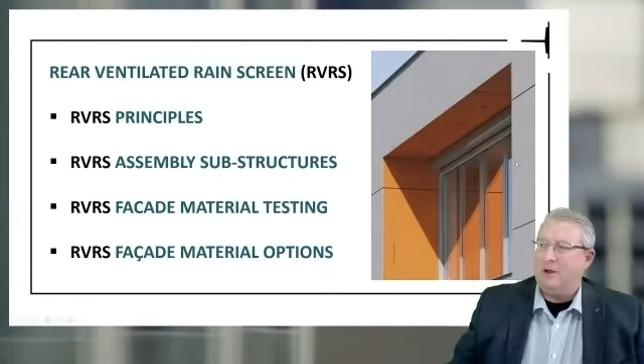We're going to talk about some testing, there are some standards in Canada that you need to meet for commercial construction. There's not as many as you would think, but there are a few real critical ones, I'm going to talk about those today. And then I'll get into all the materials, some of the things you can play with as far as looks, appearances and materials, and their benefits and their aesthetics, which are fairly important in architecture. I'll have a Q&A session at the end, if everything goes smoothly, and I'll let Jose open the mics for that when it comes.

So when I talk about rear ventilated rain screen, there's actually two word combinations, rain screen and rear ventilated, and one came before the other. Actually, rain screen in the history of wall construction is really old, it's been around since the 1100s in mostly Scandinavian countries. Basically what they did is they took old wood plank boards and put little gaps in between them to make sure the panels, the wood boards themselves, didn't rot out by trapping moisture behind it.

So what they discovered is if you just put some boards up with little gaps in it, you get to use the boards as a screen, as opposed to a big cement block wall or stone block wall. It would trap moisture in the wall and preserve it. So there's some really old buildings - you can look it up, Google it, images, rain screen Norway. You can see some really old buildings.

But the principles behind rain screen are fairly straightforward and fairly universal across the industry. Everybody agrees with this: your facade or material acts as a primary barrier against wind and rain. It assumes that some moisture will make it past the barrier. I'll show you guys a slide on that a little later.

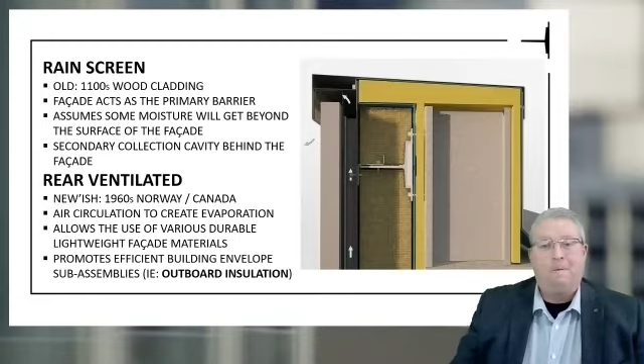All right, I'm going to show you this little clip here. We're going to talk a bit about that in a second, but we're going to talk about the principles behind this.

Also, the depth of the plenum, which is the rain screen cavity, that area there - typically most manufacturers want us to do 25 mils or 1 inch. You can go down to 19 mils. There's some papers that even say 3/16 is better than 0. You're trying to prevent capillary reaction where the water drips on the surface, wicks in, and then kind of jumps across to the other side.

But for the most part, about 1 inch is the industry standard, because that's sort of what you'll find - a lot of industry standards are just what we had laying around a lot of. And in the metal girt industry, 1 inch metal girts are very common, so they just grabbed those suckers and slapped it up, and suddenly we have an industry standard. But it's important to have those because everybody can do it - it's not hard to source, you don't need anything unique or distinct. So it's a very common piece of metal, or sometimes wood, used in the vertical channel there.

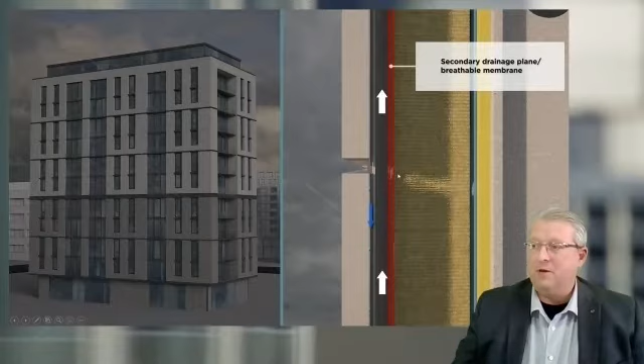We don't have a lot of rotten walls like we used to years ago. Something else to keep in mind is that rear ventilated rain screen uses ventilation.

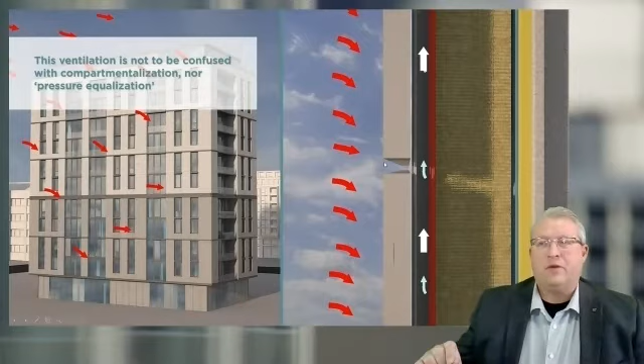There is a rain screen system called pressure equalized cavity, or PEC, or pressure equalization. Those are a little different—used more in architectural metal panels. You'll see those. They actually compartmentalize each panel area; they don't have the through ventilation all the way up the facade. The reason is they use a different principle called Venturi, pressure-like equalization cavities behind each panel. If you want to learn more about that, I'll have to do another lunch and learn, or you can talk to a composite metal fabricator or supplier.

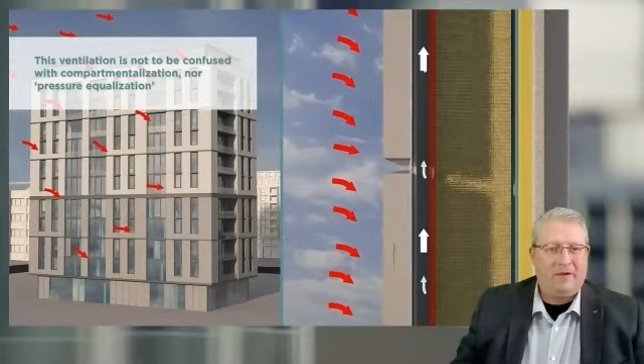Sorry, guys, we got another thing going on here. Can we... there we go. Perfect, thank you. All righty.

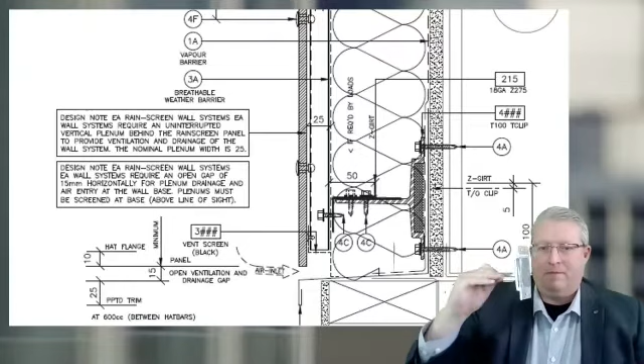This fancy little item here is called a clip—I'll show you more of that later. That's basically a structural support to span the depth of the insulation. So you have this insulation cavity here.

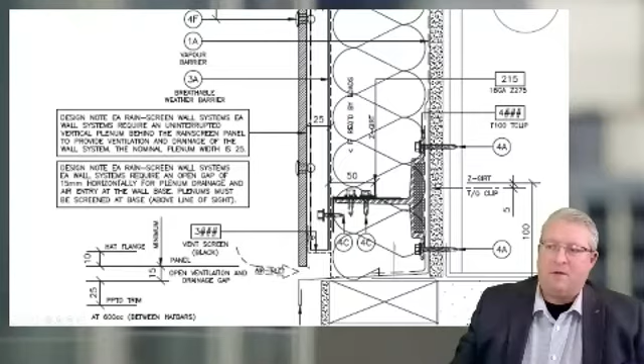In order to create a rear ventilated rain screen, the bottom of all wall assemblies sits above your through drip flashing—this big long drip flashing along here, I hope you can see that. There'll be a little gap at the bottom of the wall panel facade system where air is allowed to go in. This dashed line is actually perforated flashing with slotted holes, typically, though it could be round ones, and that allows air to flow up and behind the facade, getting ventilation behind the system. Then on top of that is your facade and whatever method used to attach it—I'll cover that later. So that's at the bottom of your wall.

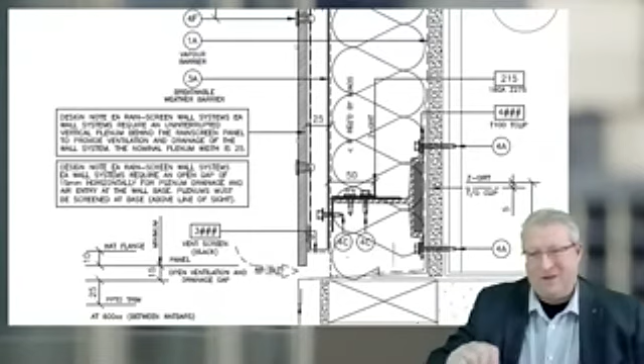This is a requirement. If you don't have a place for air to come in, air can't come out—you need a place to do it. It's not just a dead air space; it's actually an air inlet, sort of like a chimney on a fireplace.

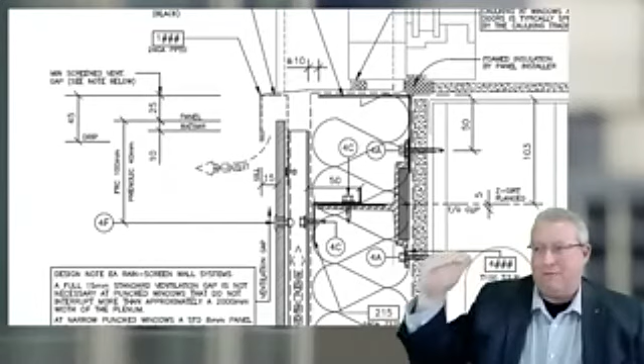Then at the top of your assembly—now the top is kind of subjective. There's two tops. There's a top at wherever there's a windowsill or a door header or something along those lines, wherever there's a flashing or penetration that goes all the way through. That's technically the top of that facade, not the top of the building necessarily. Top of the building includes more, I'll show you a detail, but this is the top of that facade assembly.

So you need an exhaust place, a place for the air to come out. Here the air is traveling through that plenum, it reaches this sill flashing for a window, air flows around, bends, and there's a bit of an offset gap here, then it exhausts out. So air in, air up, air out—one continuous loop.

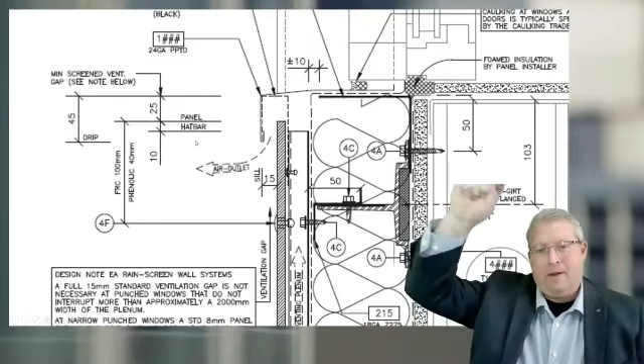Actually, if you go behind a rear ventilated rain screen system on a hot day with dark panels, you'll hear a little airflow. It's quite remarkable, but that's important. So inlet, outlet—all rear ventilated rain screens need an outlet.

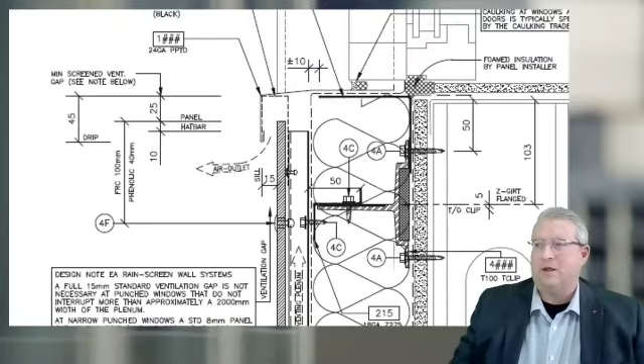You do these three basics, you have an active rear ventilated rain screen. What you've got to worry about is any sort of blocking, flashing, or fire stopping on the outside facade—sometimes people stick things through there. Wherever you have any sort of horizontal blockage inside the wall, right over there on the side, you've got to watch for it. We'll talk about that a little later.

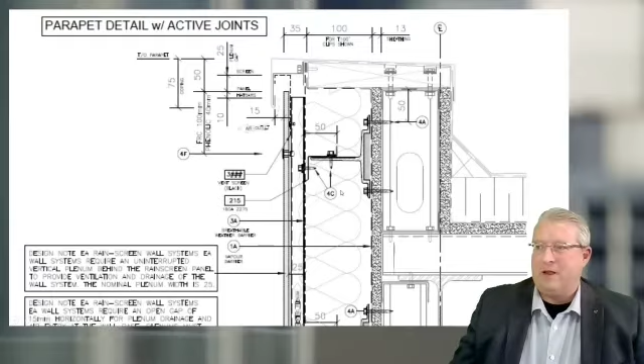You'll find a lot of the construction industry, if you're not familiar with it, uses names like Z bar, C bar, D bar, hat bar—they're all named for the shape of that profile. So a hat has two legs and a face. That's what they typically use, or what we detail for our system, running vertically, and that's what creates your airspace.

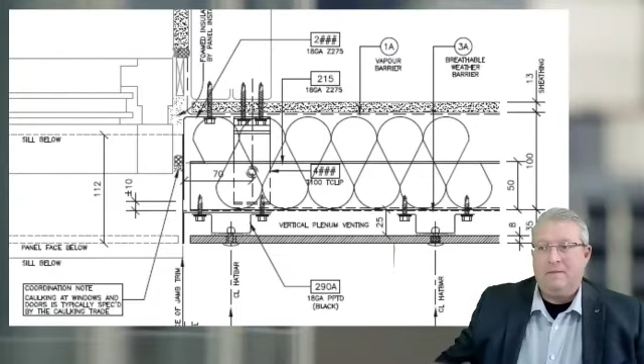They're ventilated at the top and bottom, and then at the side you can see this one has a flashing that returns to the window. It straps down the sides just to cap and make a nice clean look. There are a number of ways you can detail this, but this is fairly basic.

All right, so that is the principles of rear ventilated rain screen: the airspace, the ventilation, the proper detailing, typically vertical strapping, hat bars, something like that.

Now, to get there, we have to start building from the substrate out. So we've got to work from the drywall, the exterior drywall or exterior plywood, or whatever the exterior sheathing is, where that vapor barrier typically is. And typically there's that layer of insulation on the exterior, which is common with commercial—3 inches is very standard, 4 and 5 inches becoming a lot more popular, even 7 and 8 inches are becoming more and more common as you're starting to require higher overall effective R values.

So these clips, these systems that were engineered, were to replace what used to be just a big Z profile, a big Z bar that went all the way through the insulation, really tightly spaced. You get a lot of conductive heat loss through that. So the industry has pretty much migrated to these short, little, small clips. I'll show you some pictures of that later on, with a much shallower Z bar, just a bar on the outside tip, and that reduces how much heat conducts through the insulation, either from the inside or outside.

A couple standards to know: ASHRAE 90.1—American Heating, Refrigeration, Air Conditioning—I don't know the acronym off by heart, but it was the very first standard to apply to walls, specifically to the substructure, the metal parts behind the facade, between the facade and the sheathing. ASHRAE 90.1 exists to help improve that part of the building envelope—your exterior walls, your roof, your windows—but particularly that part of your wall system, to reduce how much heat is conducted through. So almost every clip made, and there's about 20 or 30 types of clips on the market, maybe more, meet ASHRAE 90.1.

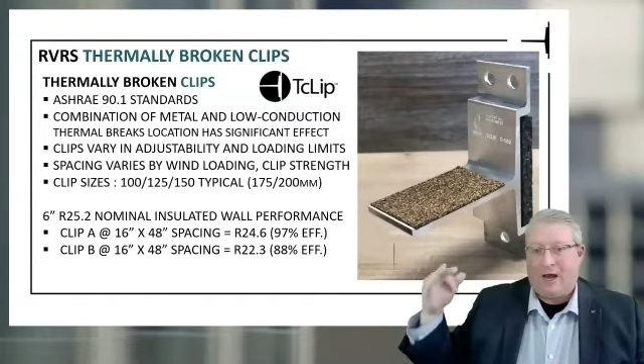Now, that being said, they both meet ASHRAE. They're both very good, way better than what we did 30 years ago. So you'll see steps like that. But if you're looking at creating a high performance wall system, really high performance, you've got to look not just at the standard, but also how they perform and what clip spacing based on your wind load for your project. A one-story strip mall in Calgary will have a different wind rating than a tall-story high-rise in Regina. Okay, so just keep that in mind.

So here's some examples. Here's a model of it in the back right. So this is the T-clip itself, and then the little short Z-bar, and this is it on a wall. So the blue is that barrier, vapor barrier in the background, air vapor barrier in the background. There's no insulation showing on this detail, and this is the bars.

So you can see that they space out - there's the clips, clip, clip, clip, clip. It's usually one clip per steel stud on the wall behind it, and on concrete there'll be different spacing. And then the Z bar that you see running across here, okay, that's this little Z bar. It doesn't go all the way through the wall - it's just short and shallow.

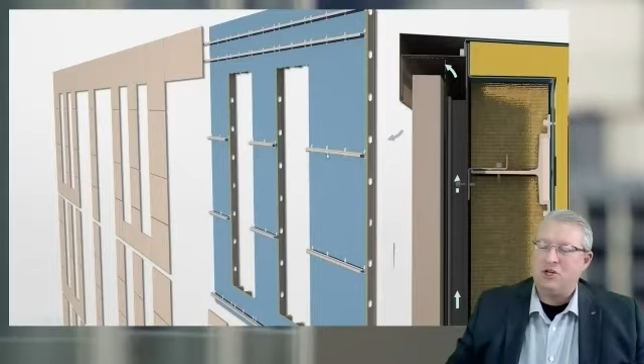It's a little bit modified. This is where you can kind of adjust and correct imperfections in the wall, and there is always imperfections. But that's where the insulation will end up spanning in between, so all that stuff is covered by insulation. The further apart you can go row to row, the more efficient it'll be and the less cost it'll be. So it's a win-win.

Then once you have those Z bars, we're going to add another layer here - these are the vertical hat bars I was talking about. In this case we're using a metal bar, and that's what creates your substructure. So between your structure, which is your steel studs or concrete or wood studs, and your substrate, which is gypsum board, drywall, whatever you're using on the outside, or plywood sheeting or OSB - then you've got your typically vapor barrier, subgirt, hat bar. That's what we're showing in this image here.

All right, so once we got that, we got built out - so we got the premises there. We got our vertical hat bar, which creates the rain screen plenum, the rear ventilated rain screen plenum. The next step is how do we mount it, right? There's two different ways of typically mounting the panels themselves, the rain screen panels.

So I'm gonna grab a piece of material here. Here's an 8 mm fiber cement panel called Equitone Tectiva. How do I going to put it on there? We have a couple methods - you can read the slide.

Face fasten, which is rivets or screws into metal hat bars, wood strapping, or some other vertical hat bar system or vertical strapping system. That's fairly common. A lot of these materials are structurally strong.

This material doesn't require any frame or reinforcement around it. It's strong on its own, dense enough, strong enough. It doesn't need an edge like you'd put around a pane of glass to protect it if it's not thick enough. This stuff is strong and thick enough that most people don't do a frame.

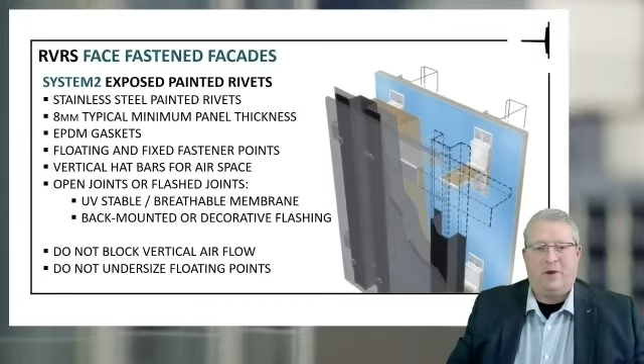How are we doing? Everybody good so far? Thumbs up. Anybody? I don't see any videos. So far, so good, we're good—thumbs up, awesome, thank you guys. Just want to make sure I'm not missing out on anything here. I can go on pretty quick.

So, hey, sorry Ian. Yes. If I can jump in with a couple questions. The first one actually goes back to when you were talking about the 1-inch air gap.

Yes, and that it actually came to be 1 inch mostly out of sheer convenience rather than any objective data to prove that was the best way to do it. I'm going to ask, is there any data or studies or modeling that has taken place to determine the ideal ventilation cavity? Yes, but you'll find whichever expert is paid by whichever supplier will tell you whichever answer benefits them. But there is some scientific process behind it.

Here's the challenge: you can have the scientific paper, but when your subtrade goes and says, no, I'm not doing that, I don't know what we're doing—that becomes the issue.

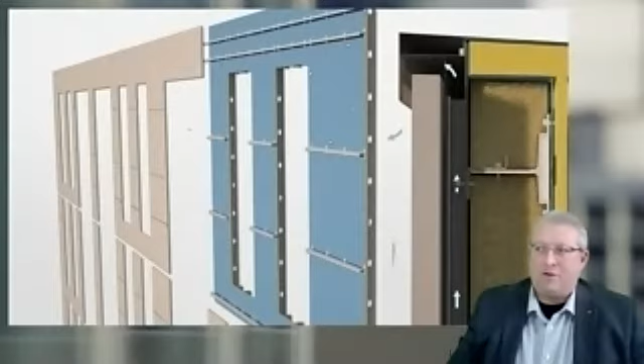And there are other factors. Remember when I showed you that spacing for the bars? That's based on assuming the strength of the hat bar, because you have all this wind, wind-driven rain, and pressure on the exterior—negative pressure, positive pressure. So the strength of your clip, your hat bar, your Z bar—that's what gives you the rigidity of your facade. And there are deflection limits; you can only let it bend so much. Some of them are pretty tight and strict. So that 1-inch hat bar has a certain amount of strength it's adding to that formula.

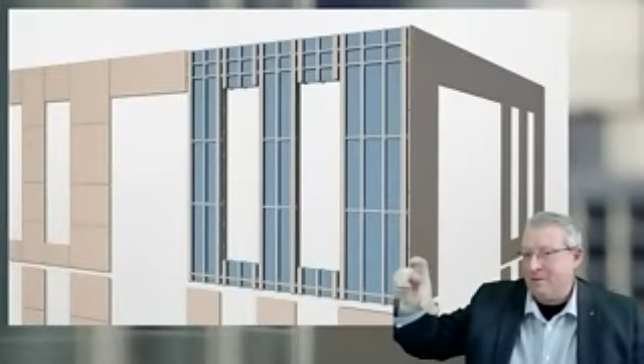So if you make it a 3/4 inch or 1/2 inch hat bar, does it still have the same strength, or do you have to increase your number of rows? So yes, there are some assumptions the industry made—they maybe erred on the side of caution, or erred on what they had lying around—and they've tested those assemblies. There are some standards for testing, but they're not uniformly applied, because almost every building, with the exception of a very few in commercial, has its own little tweaks and assemblies.

So nobody's gotten every assembly in every configuration 100% tested—not even us, and we're pretty darn good at this. We have a published national design guide that we promote, and even we don't have every configuration possibly tested in a lab.

Okay, right, so you'll find out—we're still the construction industry as we know it, guys. I mean, 1960s, 70s for this type of material, that's it, that's the history. It might seem like a long time, 50, 60 years, but in building science, it's a drop in the bucket.

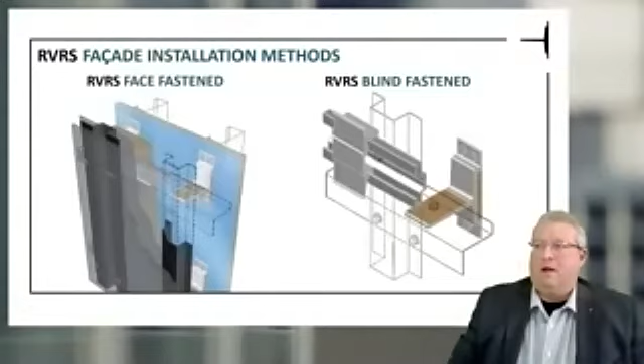So there'd be some difference, like I'm thinking the cavity you might want in, say, Vancouver's climate versus, say, Saskatoon's climate being much drier.

Is that something that should be considered? Good question.

I'll cover some of these a little later on, not this specific one, but I'll say the brief answer is that cavity depth is typically a minimum that the manufacturer wants, and it'll vary a bit on the height of the building. If your building is particularly tall, or if you have a long run between the inlet and outlet for ventilation in a rear ventilated system, and that's going to end up really high up, you might want it a little deeper. So there's a couple of tweaks people have done in anticipation to try to avoid future issues. That said, I could spend an hour on that alone. We're going to move along.

All right, face fastened. In this case, this is where you're literally riveting or screwing the material right through into those hat bars. So it's very efficient. You have those hat bars up there dealing with the structure, holding the weight, wind load, and deflection anyway, so why not just run a screw right through it? That's typically what's done.

Although the system that we promote is rivets, because it's harder to screw up in terms of over-tightening or under-tightening, which has always been an issue in the industry. It's getting better, but we find rivets have a certain set position and don't break off, so it's perfect. You can usually get really thin, like 8 millimeter. If you think about your facade on commercial, 8 millimeter or 3/8 of an inch is really pretty thin. There are even some 6 millimeter, 1/4 inch facades you can face fasten, not tons of them, but 8 millimeter tends to be where most of the industry starts, and then they go thicker from there.

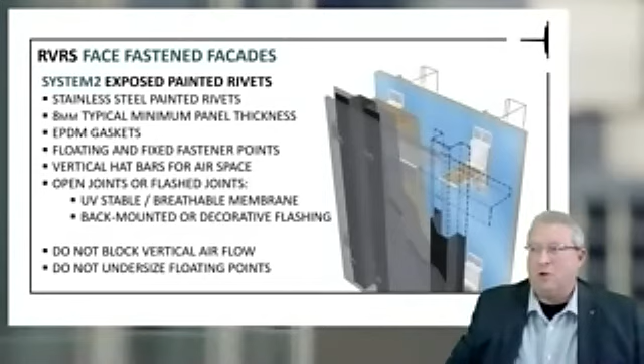The other thing is don't block vertical airflow. So whatever flashing you're doing across, or joint closures you're going to do, those closures can't go all the way back and block that airspace. You don't want anything running horizontally across that'll close a joint and block it. That happens fairly often, and then the panel misbehaves, either color-wise or it changes shape. We open it up and find some guy put a horizontal block in that airspace. So that's the only thing you've got to watch for.

Usually there's two of these fixed points per big panel, so it holds the weight. The rivets themselves, one rivet can hold almost every panel we make, every manufacturer brand. The rivets are more than enough strength and shear. What we're worried about is wind load, popping off, suction, wind force. That's why we have floating versus fixed.

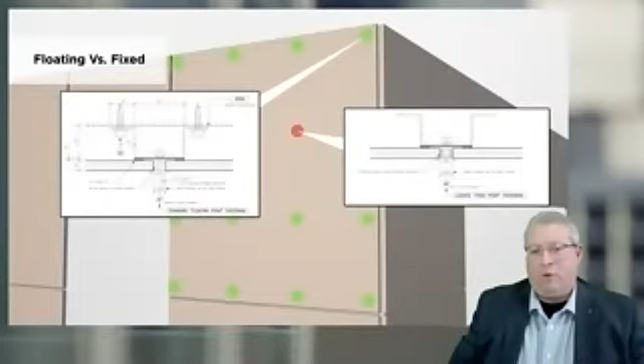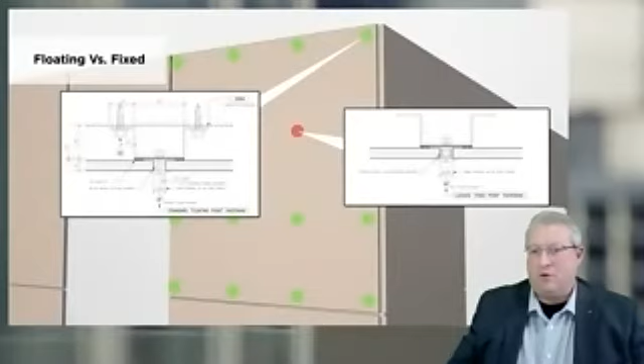So that's fixed fasteners. Do you have to worry about that as a detailer? No, but if you work in the installation industry, you do. If you end up working for Flynn Canada, Thermal Systems, Igloo, there's a whole range of people. If you end up working in that industry, and some of you probably will, you'll need to know about fixed and floating points, if you're working on detailing or shop drawings or running site supervision, something like that. Which is not a bad idea, you get some good experience.

Face fastened facade, this is what it looks like. We call ours System 2. We've created multiple systems. System 2 cost us about $500,000 worth of R&D over 10 years to publish this wonderful little guide that everybody takes advantage of, which is what we want.

Because if any of the rear ventilated rain screen products we sell fails because of poor installation, our reputation gets damaged just as much as the installers, sometimes more. So we just want to make sure it's as bulletproof as possible, idiot-proof. We just want to make sure that people have everything they need to make the proper decision, even if they don't.

If you want something a little fancier, you can do concealed, where they're called blind fasteners, where you don't see them, blind. The fastener system that we carry is called a clip and rail. There's the clip that's mounted on the back side of the panel, and there's the rail. You usually need a little thicker material depending on what type of fastener.

You can still use the 8 mm, very thin, with either a special type of mechanical anchor, like an expanding rivet called a tough fastener or turtle fastener. Or you can use an adhesive, a dynamic bond, sort of a polymer type of glue, for lack of a better word. Super, super strong, works in all climates. That's another way of doing it. So you can get very, very thin facades, very thin veneers, if you want to call it, and all that would really vary is how many clips you have on the back.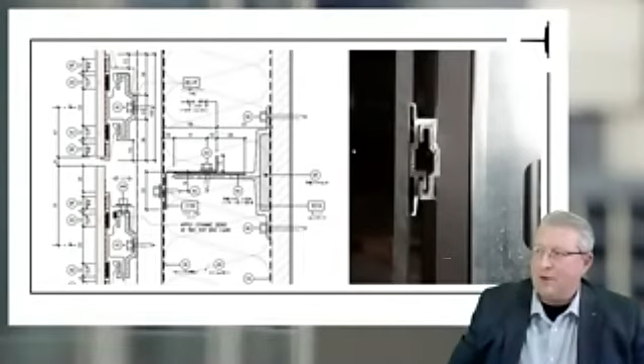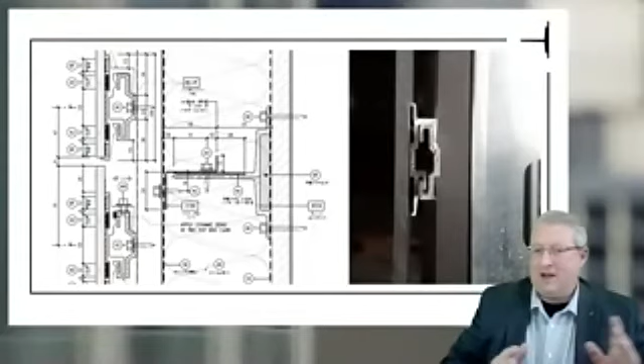They hook on, they tap, they drop a screw on the top of one of these clips at the very top to do a fixed point, just like they do with the rivets where they do that collar. On concealed fasteners, all the rails and clips are all hanging and can move independently, but one point on one corner of one clip has a mechanical or bonded connection to the horizontal rail, so that way the panel can slide left or right, can't fall down, can't lift up. Typically the legs are too long for that, but that's what you see.

All right, moving on, standards. So when you're dealing with facades, with the outer layer of a commercial building - residential doesn't have as many strict standards either, but in commercial you're dealing with non-combustible, combustible. You're also dealing with sort of quality standards, like how well does my product stand up to rain or frost or any of those types of conditions.

So these are lunch and learns on their own, these are long topics, I can't do it justice here. But the ones you can look at for rear ventilated, there's two large industries. The one in particular for quality of materials is called European Standards, or EN, European Norm. As they imply, they're a European standard, and these are where most of these products grew up. Most of the products manufactured for rear ventilated rain screen are European made - Belgium, Germany, Spain, you name it, UK. So the European industry is way more evolved than the Canadian or even the American one.

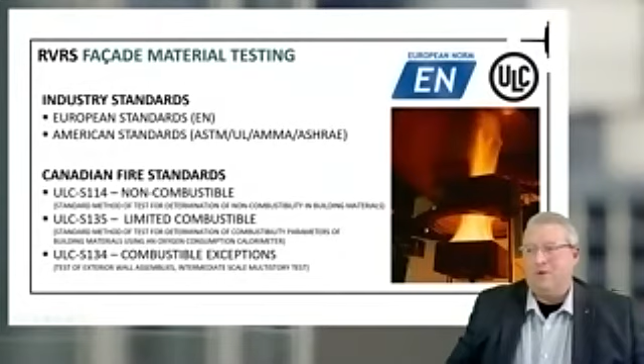And this is an exception. So what they do is a window opening, and they stick this facade material at the window opening, and they try to light it on fire and see what happens. They light a fire on the inside of the window, and they see how fast it spreads, and they see how fast the heat, how much heat it generates above the opening, and how fast the flame spreads. All right, so I don't want to spend too much time on that, but those are the three critical ones.

So let's get into the fun parts, okay? Facade material options. So now that you know how to put it on the wall, you know how to detail it to get it on your wall properly, decide between face fastener and fixed fastener and blind fastener, you've met the Canadian standards. What materials can I start playing with? So let's look into those.

Fiber cement. This is a sample I've been playing around with quite a bit. This one here, very very popular. It's been around since the 1900s. One of the very first ones in the world, like I said, 1905. A company called Eternit, which has now been rebranded to Equitone, produced a really durable but very thin cement material used for roofing and now wall systems.

FRC is the acronym, so fiber reinforced cement. It's sand cement, the reinforcement is wood synthetic fibers, so wood pulp basically, because wood's actually very strong. And then water, and that's basically it. That's the ingredients, maybe a couple additives here and there for the modern world, things to help it cure better and that kind of stuff.

I'll talk about how they're made. Equitone has its own particular way of being made. There's a few out there like it, but it's not like you take the cement slurry and pour it into a mold. There are systems that have that option where you just mix the cement and pour it into a cast and let it harden. Those tend to be glass reinforced fiber cements, so GFRCs. But the one that Equitone uses is a lot different. I'll show it to you in a second.

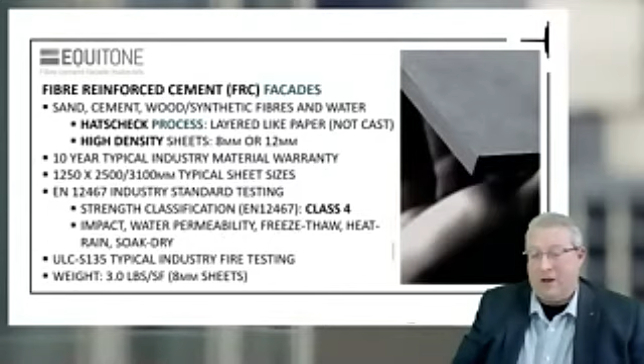That's important when you guys are picking it up, installing it. So this is how this product's made.

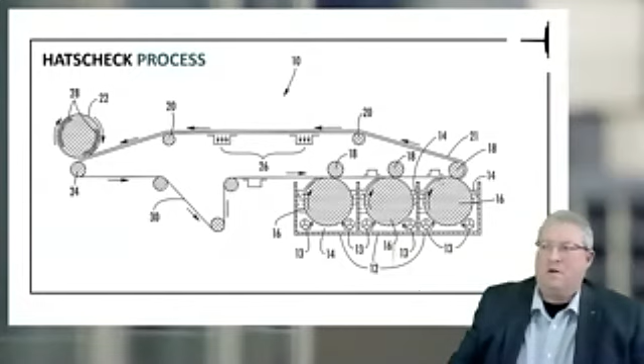So these little vats here on the right, these are big drum rollers, and in that is that sand, fiber, water slurry - a big pool of fiber cement, basically, uncured. And then what happens is this conveyor belt system has a felt on it, and it slowly picks up layer and layer and layer, and it builds up this thicker and thicker layer on this conveyor belt system, and it deposits it onto this really large drum.

All right, so this is that layer, that conveyor layer system. So you can see the fiber cement slurry slowly thickening and thickening. And then what they do is they build it on, they transfer that layer onto these big, large rollers, these huge rollers.

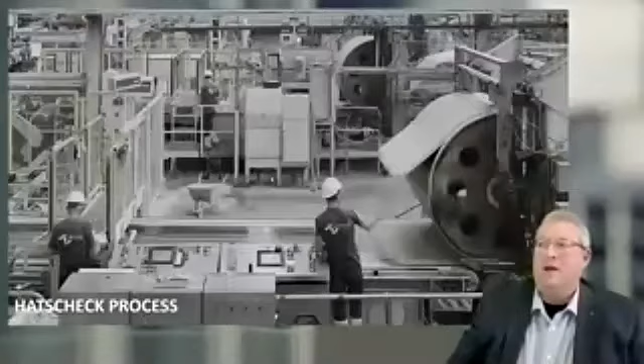And then after that, they take that roller, they slide it, they slit it, and they slide it onto a tray, and bingo, bango, you got a sheet, right? So he slits it, it rolls off this way, lays into a sheet format, they press it, squeeze the extra water out, make it higher density. And that is Equitone, and others like it.

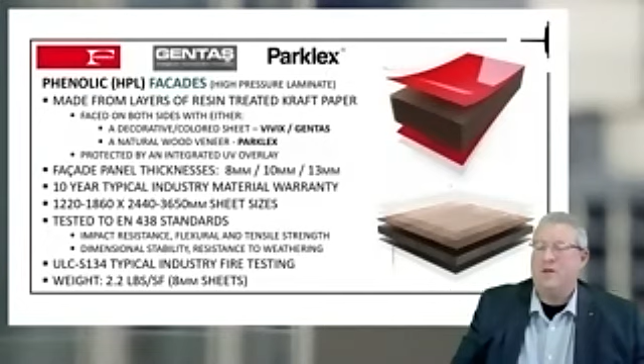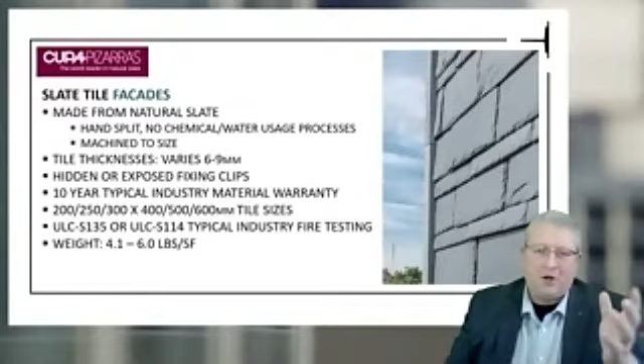They have hidden or exposed fasteners, again a 10-year warranty, lots of variety in sizes. They have both industry fire testing, depending on which one you want, because again of the thickness. They're a little bit heavier, but not much - depending on the tiles, they vary in thickness, like even when hand split they might be a mil bigger or smaller, so that's the variation in weight. But that's what she looks like as a facade.

This is beautiful stuff. Something else I would sell to a residential contractor, because it installs more similarly - it still has a rain screen bar system behind it, but it's simpler to install than some of the other ones because it's pretty forgiving if your plywood or sheeting is a little off tolerance.

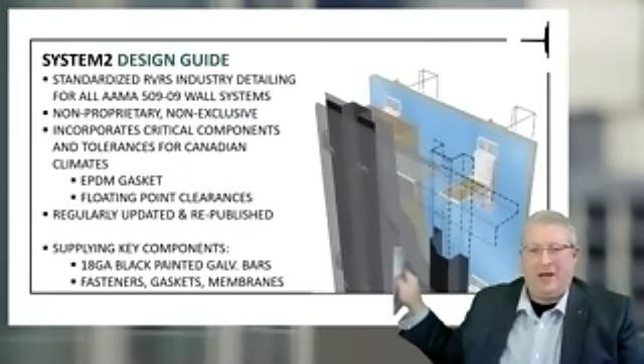Okay, so I'll wrap up a couple things and then grab some questions. For engineering assemblies, we're always trying to get the contractors and architects united, to design the house with the field of construction in mind. So we created these publications where architects and sub-trades are working from the same Bible, to use the acronym. We standardized everything - in our design guides, right at the very back, there are these little engineering stamps. You can see it where my finger is, right there. So we've actually created pre-engineered systems.

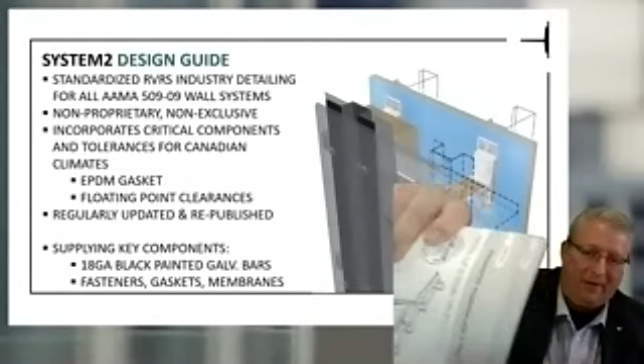If anybody just wants to follow our design guide instead of re-engineering themselves, they can. It's non-proprietary, so everything that works for my fiber cement works for pretty much every fiber cement. It includes all the adjustments for Canadian climates, like our gaskets in particular, and our fixed and floating points. It's regularly updated and republished, and we sell all the subframe components.

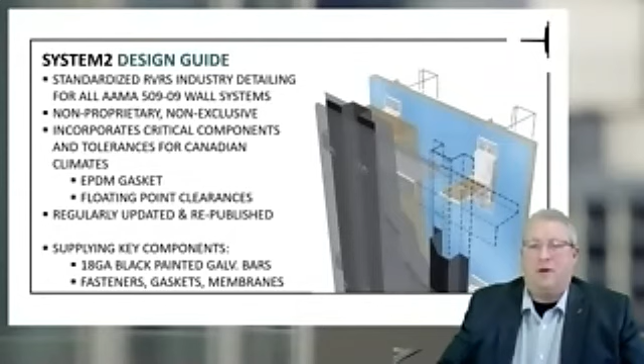One of the things that's important when you're selling or promoting a system, any system, is that one competitor shouldn't lock the other out, as in, if you don't buy my system, you can't use my components, so you have to redesign everything. We've actually stocked all the materials behind it, all the substructure components, so people can use it.

Something else: don't become an expert if you're not one in that area. Don't pretend you are. My job is to educate architects and consultants. They're the ones who are the experts in the construction of a building. I am not. I'm the expert in my little part of the pie.

I always support my sub-trades. They're the experts in how to install it. They're the guys who do the installations. I don't. And with owners, we always try to make sure they understand the pros and cons properly, so they're getting what they actually buy.

The industry has a lot of work to do as far as standardizing systems or getting our specifications consistent. Specifications are what people write to ensure the quality of a product. So we've hired full-time consultants, and we're hoping more industries do the same.

If you're looking for information, make sure you talk to suppliers for things like finishes and test standards. Talk to contractors when it comes to install rates and schedules, how long it takes to install something, for example. Guys like me may not know that particular market.

And then regulators, if you're not sure, talk to your regulator. Pick up the call, any Joe Blow can do it. You don't have to be an expert. You call up a building code expert and say, guys, what's going on here? Can I do this or can I do that? Or talk to inspectors if you already have one. They're experts in this industry.